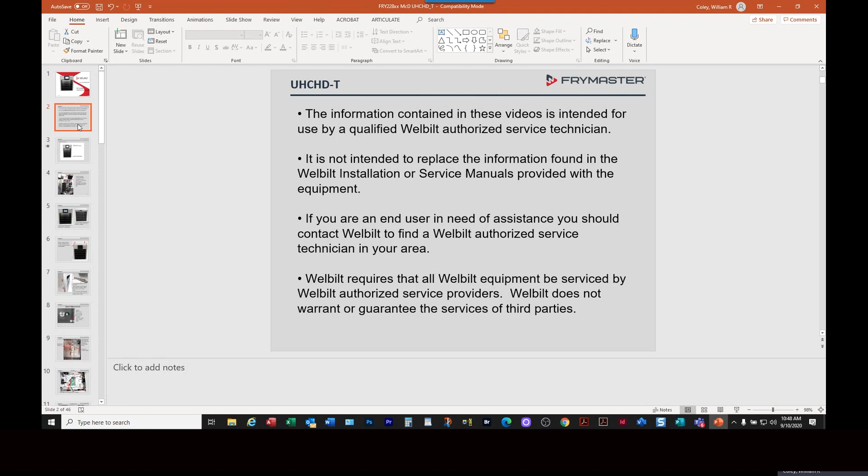I've got a brief video here. Let's put this in show mode for it to run, in which you can see the cabinet operate. The purpose of this is essentially just to see how the touchscreen behaves in operation.

This is an earlier version of the screen, so there may be modest variations. As I said, the cabinet was introduced in February, and there's been some running changes with the software that have changed the screen, but the gist of it is what you will see here.

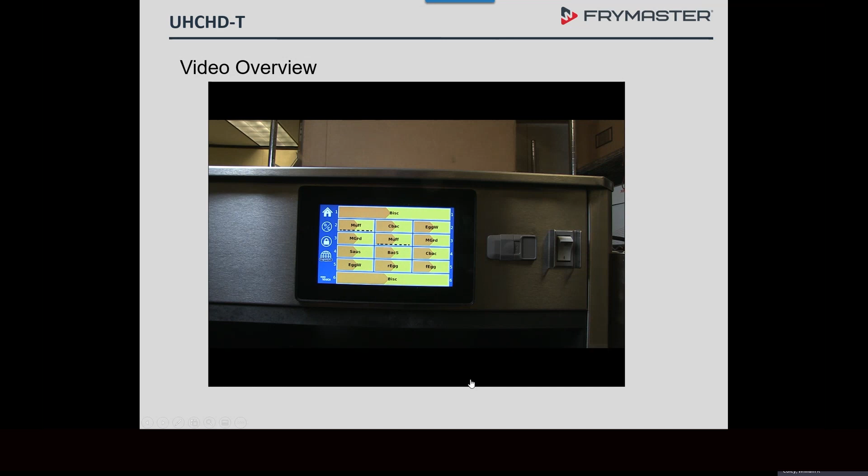The new generation of UHCHD cabinets introduces a single touchscreen to control all cabinet positions. The touchscreen on the UHCHD Touch opens a press-and-go screen that displays a yellow and brown graphic as it warms to set point. The moving brown bar shows the progress of the heating. The icons along the left side of the screen can be navigated as the cabinet warms.

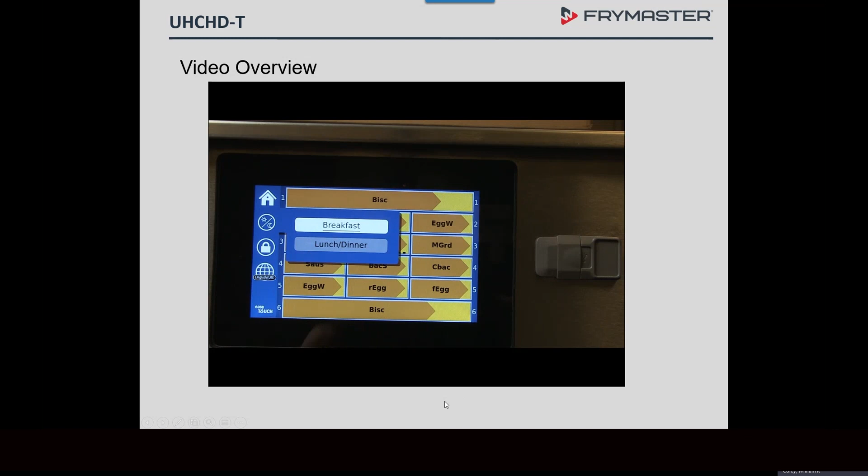Pressing the Day Parts button produces a pop-up that allows switching from a...

We can stop that there. That's some operational stuff. As I said, the screen has changed some, so it's different in appearance, but not operationally. It's still largely the same. Just to give you an idea how it behaves.

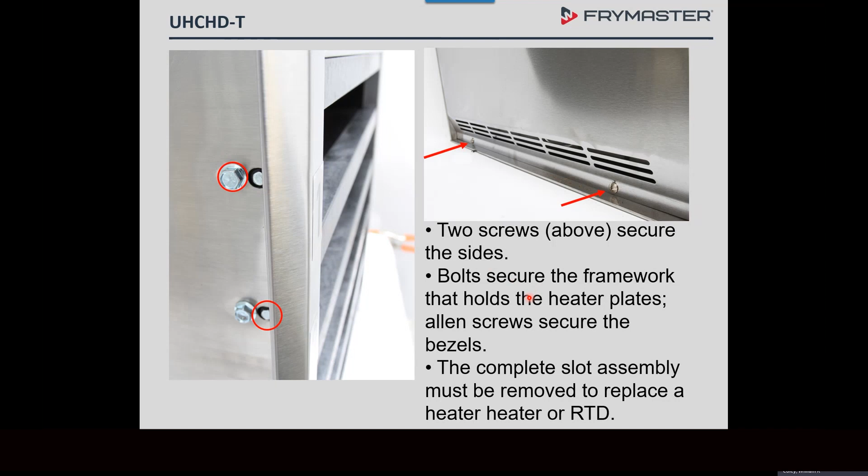This little screw will be on every one of the bezels as well. It's allowed to basically pull that L-shaped bezel in square against the vertical face of the cabinet, ensuring that no food elements can find their way into the recesses of the cabinet.

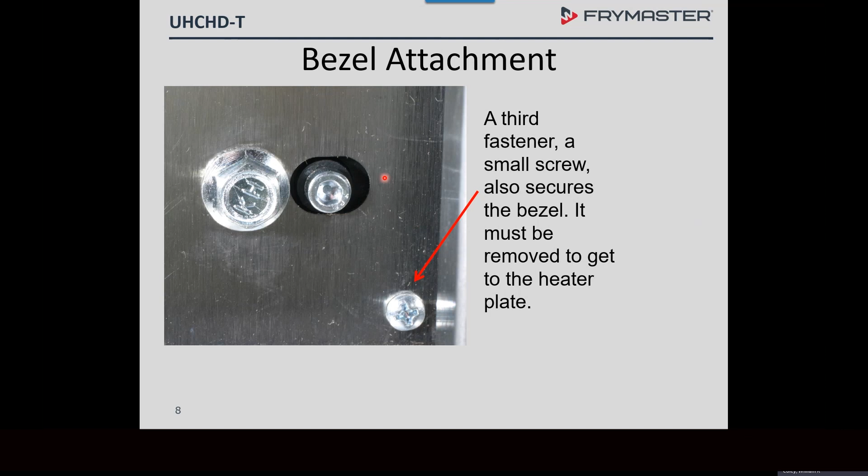But if you find yourself needing to take off the side or take out a bezel, this guy can flummox you because it's not readily seen unless you poke your head around there. So if you take this out, loosen this, and are about to remove the bezel and it won't come out, you need to look for the screw. If you don't, you'll find yourself breaking the bezel trying to pull it out.

This unit, unlike the others - if you replace a heater, you don't replace the plate. The heater is stuck on. So you take the plate out, pull off the old one, put on the new one, and it would have the new RTD on it. So that's a different operational or technical procedure that would occur in the field.

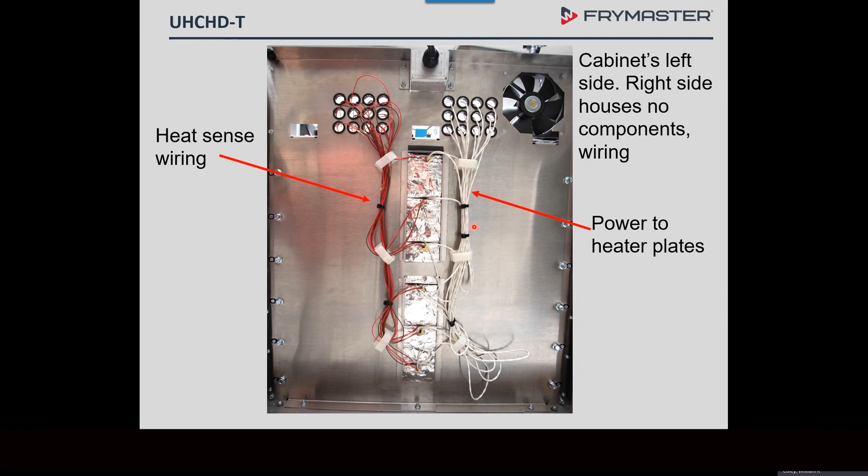The heater is the foil-backed resistive material that is stuck on to the heater plate. There's not a new sheet of metal that goes out as a new heater plate.

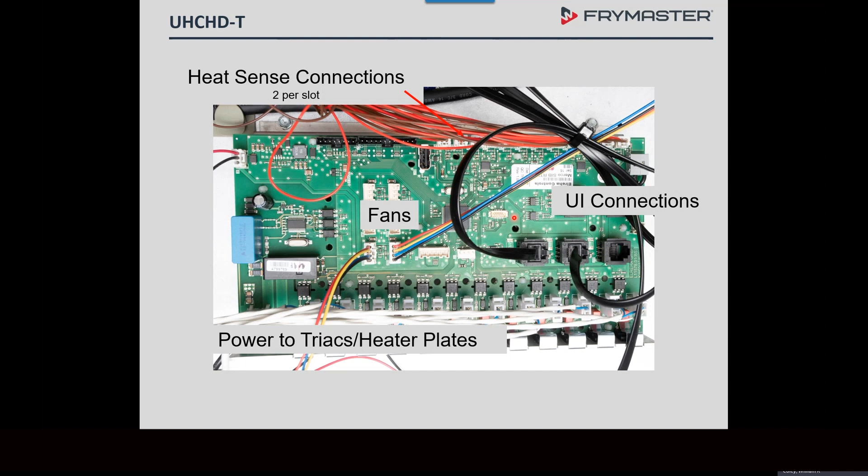Here's a close-up of that main board. You'll see the fans connection there. The fans are 12 volt DC. There are the UI connections. It's all pretty straightforward.

Excuse me, get a drink of water. That's how that looks.

When you replace one or the other, say if you replace a front UI, and if there had been a software update from the time that UI went out as a service part and reached you, and your unit had an earlier version, you'd also need to replace the software in the rear UI. You check that, we'll get to that in a bit. But when you check the software versions, you have to go through the steps to reach the software version display with the front UI, and then repeat those key entries into the rear UI to see what software version is showing. If they're out of sync, then you would need to replace that.

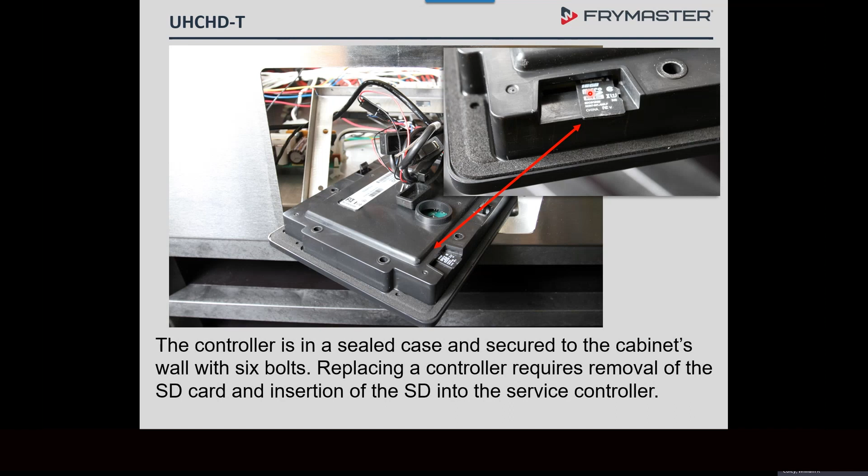But like I said, the kit does include a front and rear SD card with the software on it, and you just have to be attentive to which one you're replacing when you install the new UI. Again, this is another shot of all the USB ports and whatnot that are attached to this primary UI that you have to be attentive of when you're removing it.

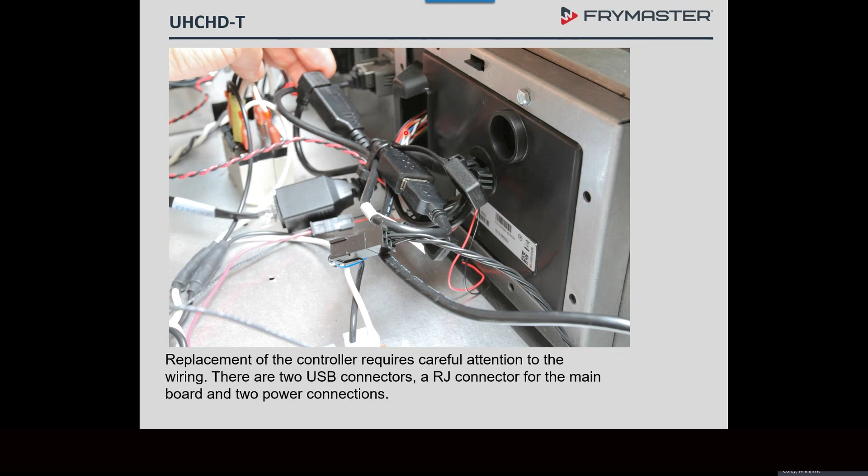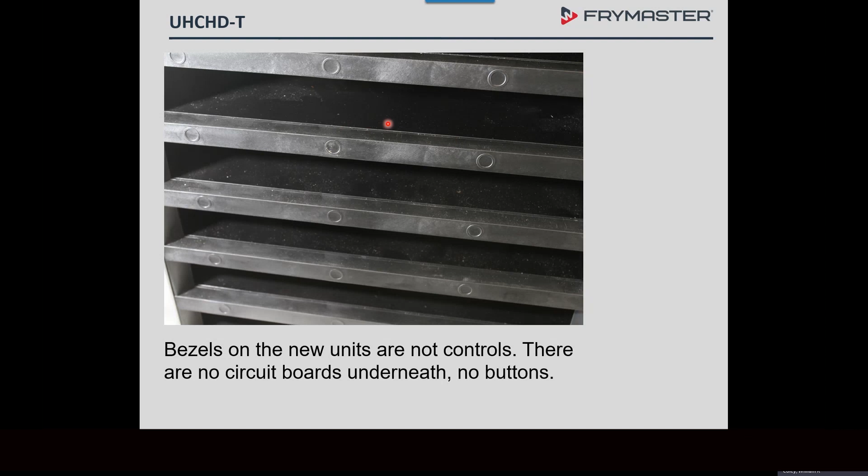There's no vulnerability associated with migration of oil, either rising from the heated trays or finding its way into the screw. There's nothing there for them to trouble. You may find on occasion that pulling the trays in and out might loosen this, but that's not an operational issue. You may find yourself replacing one of these bezels or cleaning it because of that, but there's no harm to the electronics of the cabinet because of harm to that bezel.

Quick look at the wiring diagram. As I mentioned, it's 208 single phase, so you've got it coming in through this line filter, circuit breaker here, the switch here that is basically protected from the heavy line voltage by this relay here. Throw that, and you get your 208 to the heaters. You get your 208 to the 12-volt DC power supply, which also supplies the power through the board to all the other components in the unit.

The UI that we talked about has its own onboard power, and it runs initially off the 12-volt DC, makes additional power to run it, but there's no replaceable components within the UI. If it's failed, there's no component on it that you can replace.

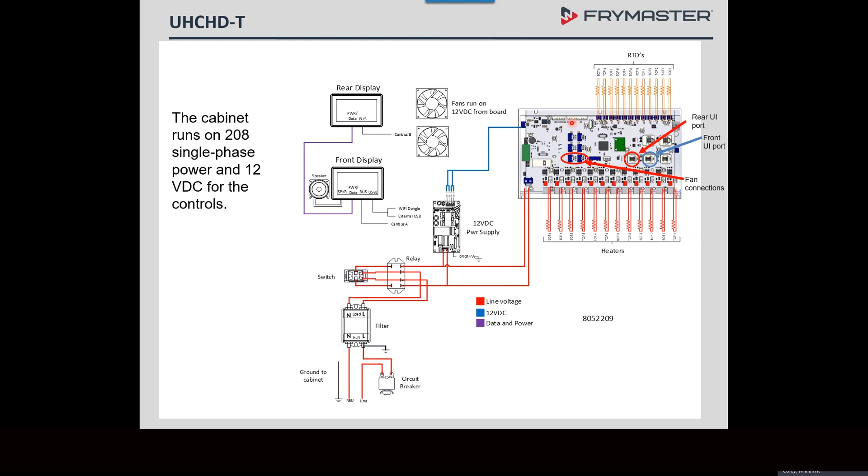This is the screen. This is essentially where you will interact and where the store will interact with the cabinet. The icons on here, press and go at the top left, is arrived at by touching the house icon. That's press and go, and it essentially takes you to the operational field. That's where all the items would be shown. When they're gray, it's at operating temperature. They touch it, it changes colors. We'll go through a little more of that later.

The book icon, top right, is where menus are changed and edited. The cog is the settings area, and we'll go through that in more detail. There's 11 screens behind there. That's the area. If you find yourself having to deal with the cabinet and use some of the onboard diagnostics, you'll use that. The other USB icon is for loading menu updates. It's highly unlikely that you would be involved in dealing with that.

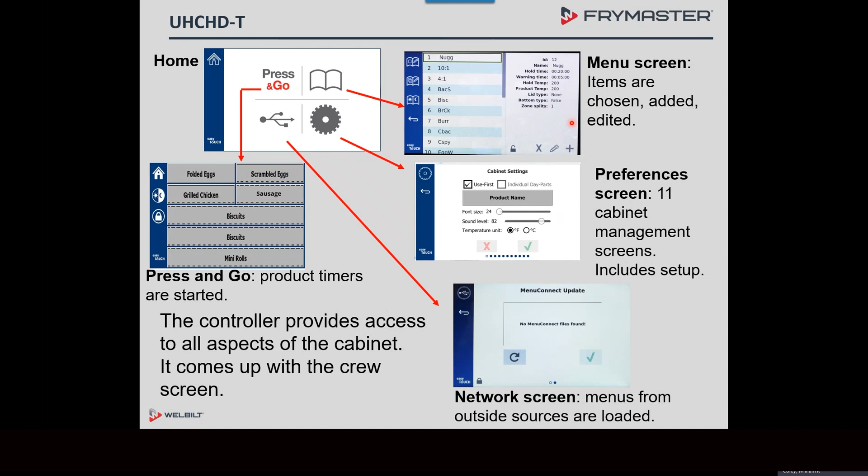Here's a further annotation of how all this works. As I mentioned, the screen to the right shows the icons that populate the face of the UI. The house icon takes you to that primary screen we talked about.

That circle with the horizontal lines through it takes you to the screen shown there, where you can make adjustments to the cabinet by pressing this leaf button. You can put it in what's called eco mode. It's not unlikely you'd have an instance where somebody did this inadvertently and the cabinet isn't reaching temperature. But if you push that button, you reduce the temperature on that row to something less than the holding temperature it's set for - a programmable number - basically to save energy.

Then you push it again and it comes back. It's different than turning it off in that it doesn't go cold - it stays near to temperature. So that's a tool they can use with rows that are unnecessary but might become necessary. They can reduce their power on and off. To turn them off completely, use these buttons over here. But all that is revealed by pressing that button, so you get to that.

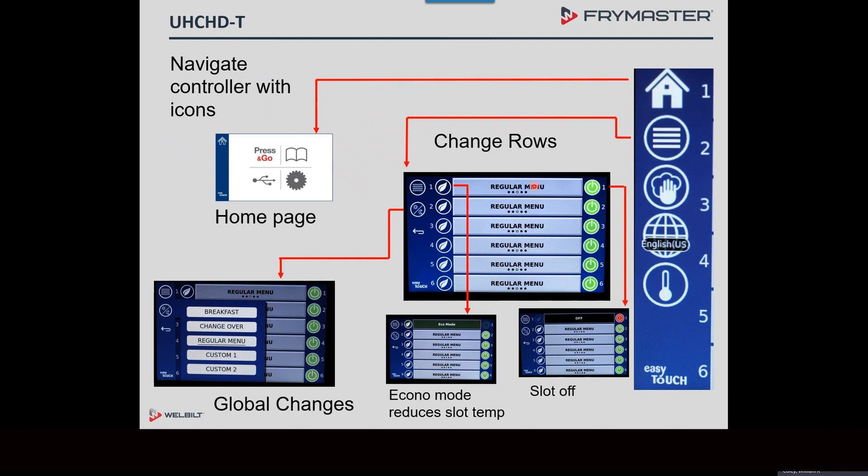So that's pretty much that. The temperature - I guess we'll get to that in a minute.

Another thing revealed when you press the icon below that, the wipe down icon, is the opportunity to put it into cooling mode, which is something you might be familiar with from earlier units. They have to be 125 degrees by McDonald's spec before they can clean them, so this puts them in cleaning mode.

If however you just want to wipe off the screen because it's got grease on it and you don't want to inadvertently change a timer or whatnot, you push the clean button, which produces a new screen with this lock button. The lock button just locks the screen for 10 seconds. So if you push the lock button after pushing the screen or cleaning button, you now have 10 seconds to meaningfully wipe down the screen without turning on or off any buttons. That's where that's hidden, and probably more so for the store - this might be confusing and you might be asked about it.

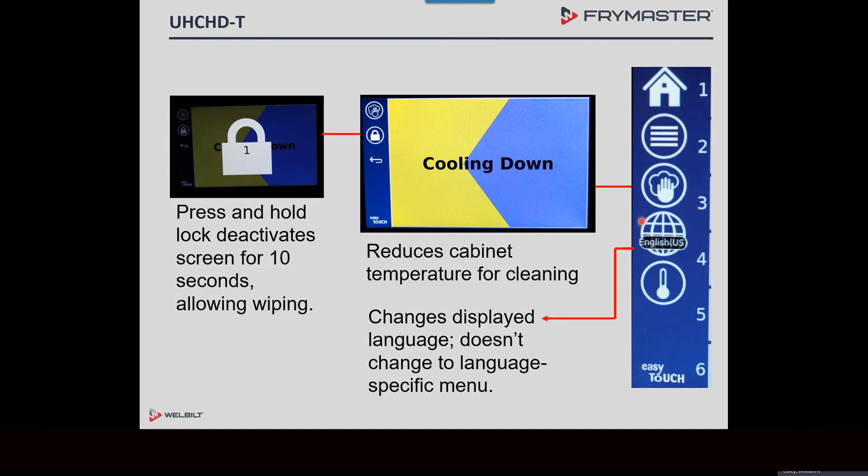But that's that. The globe button changes the displayed language. It doesn't change the language of specific menus - we'll talk about that briefly - but that just changes the displayed language on the cabinet.

The temperature button, push that and it shows you, as shown here, the temperature of the top plate and the temperature of the bottom plate. This cabinet, like the others, if you've got it set up for 3 slots, 3 food positions, all the food items on a given slot - say slot 2 - would have to have the same holding parameters.

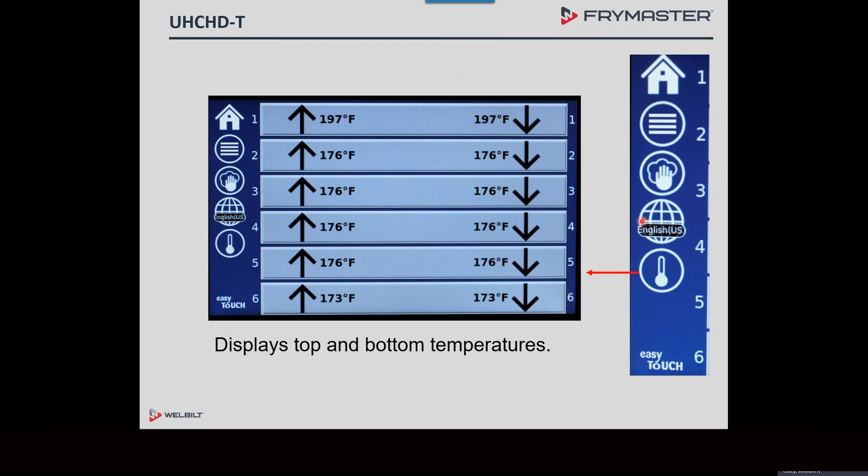It won't allow you to put a product that has a 200-degree holding parameter on a slot. It just won't show you that product when you try to choose it on a slot that has, say, 175 degrees holding.

Settings. This is the area that I mentioned that you reach by touching this cog. The first thing you enter is this, where you can change the cabinet.

This would probably not be that interesting to you guys, but that's where you can change the font size, the sound level, the temperature display from Fahrenheit to Celsius. You can turn off the use first piece.

We'll get to what that means in a bit. If you press and hold down here, where the scrolling dots are shown, you'll get essentially a table of contents representing all the screens you can scroll to, so you can get to something more quickly rather than scrolling one after the other, and make your way directly to what you're interested in.

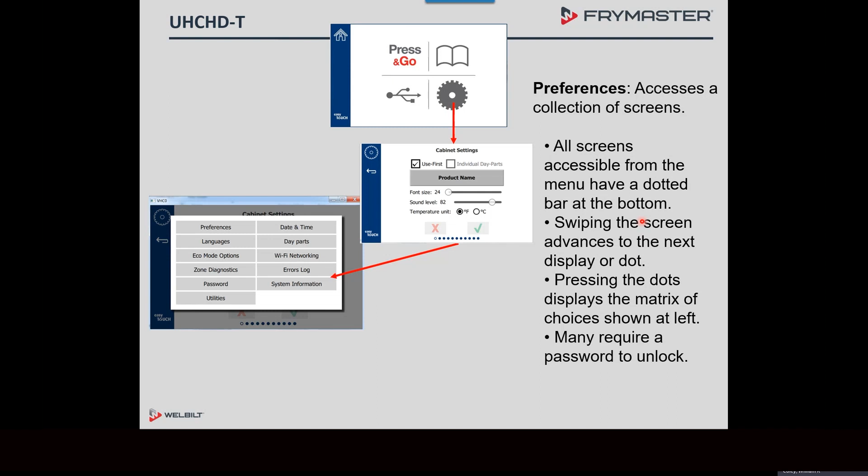So as we talked about, these are the preferences we talked about briefly. Displayed language choice, eco mode options—that's where you set the temperatures that surround how you want the cabinet to behave. You put it into eco mode.

Zone diagnostics we'll talk about more in detail later. That's a diagnostic feature that you'll find useful if you're chasing a problem with an RTD or displayed temperature discrepancy.

Passwords—you can change the manager's passwords. This is where you would correct the problem if somebody had done that for you and didn't bother to tell the manager. You can check the sound.

You can check the screen with that. Date and time—this is something you might need to get into if the cabinet arrives at a site that's not central time, because we set all that here. When they leave, there are batteries to power that part of the controller when it's not powered up, so it should be accurate if you're in central time, but if not, this is where you'd interact with that by pressing that button. We'll see some more of that in a bit.

Day parts is where you can name or turn off that menu. Wi-Fi is where you would hook it up to a Wi-Fi in the store, if it's currently not in use in McDonald's.

The error log is where you would see errors in the cabinet, and this cabinet, unlike other products, doesn't use a code. If there's an error, there's an English explanation, or at least a brief word or two that gives you an idea of what happened. You don't get something like E34—you're going to have a word description of what went on.

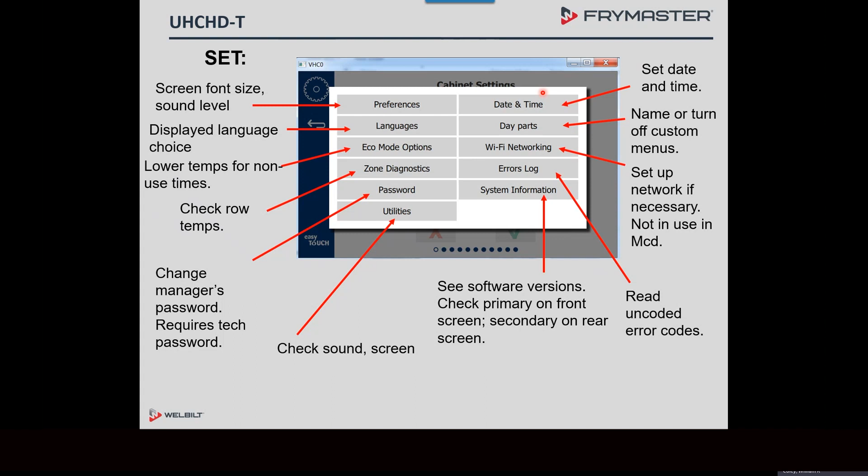And the software versions I mentioned earlier as being important to you if you were changing a UI, because you have to do both the front and the back. It's not apparent that you're not seeing both when you see just the front, but if you replace the rear UI, you need to go through all this in the back to see the software load that's on that UI.

Talked about languages—this is the languages right now that the cabinet can display. Here's the password that is the technician's password. It's 159357. It's made easy to remember by the fact it's essentially just an X pattern.

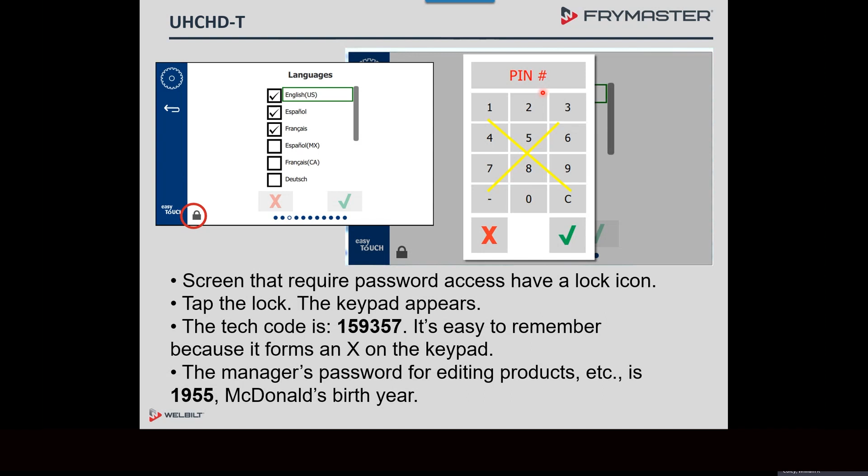The manager's password is 1955, which is McDonald's birth year. So if you're planning a birthday party for McDonald's, then you'll know their birth year, and that's the code for the manager. But the tech code is essentially just an X pattern across the keys of the keypad.

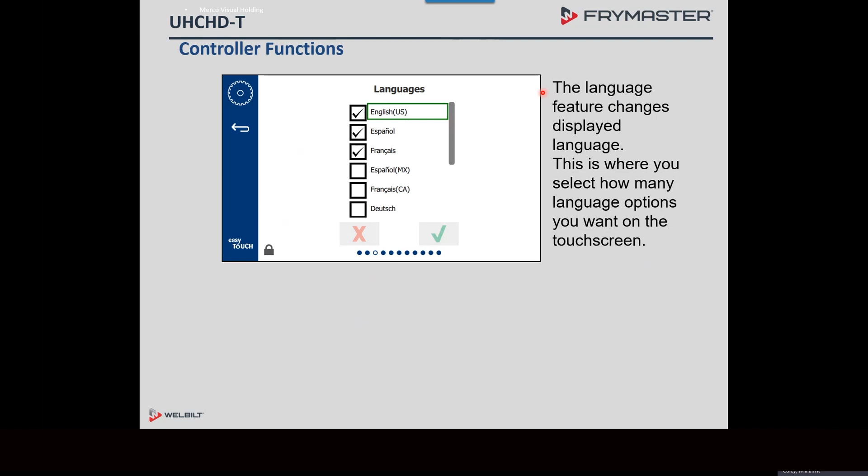We've talked about this—this is where you change the displayed language. The way you would change or acquire a different language of products is different than this. This just changes that component of it. Changing the menu load with, say, Spanish language articles, food articles, or whatnot is a different deal.

This is where that's done. You have to go in through the USB, and if it has them on board, it would allow you to choose among language-specific menus. You'll find in Australia, say, although that's English, there would be an Australian language to be chosen, and what you're doing there is choosing the Australian-specific menu. The same is true in other countries that speak English, like England, where the products for that market are different.

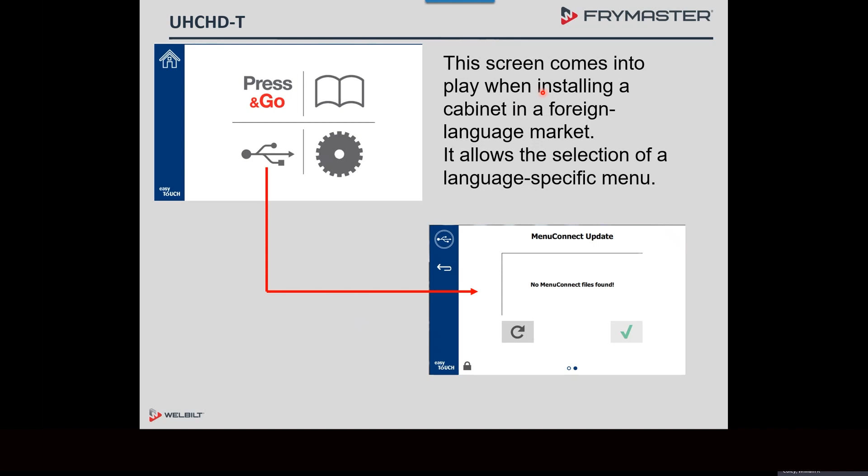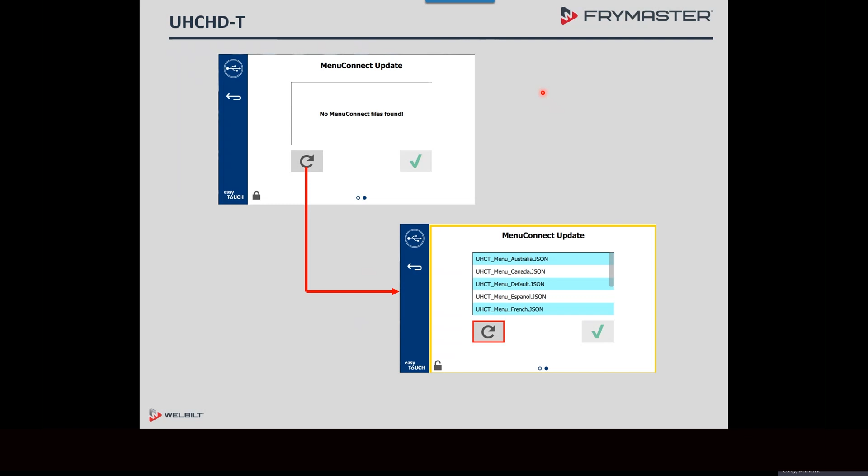So when you choose a different language product or menu, you're choosing largely different products—you're not just changing the language of the items you might be familiar with in the US. Here you'll see there's Australian, Canadian, Spanish, French. But as I said, in most instances—I'm sure there are exceptions where the menus are exactly the same—when you choose a menu that's different than the US, you're going to get not just the US menu translated, but a different collection of products.

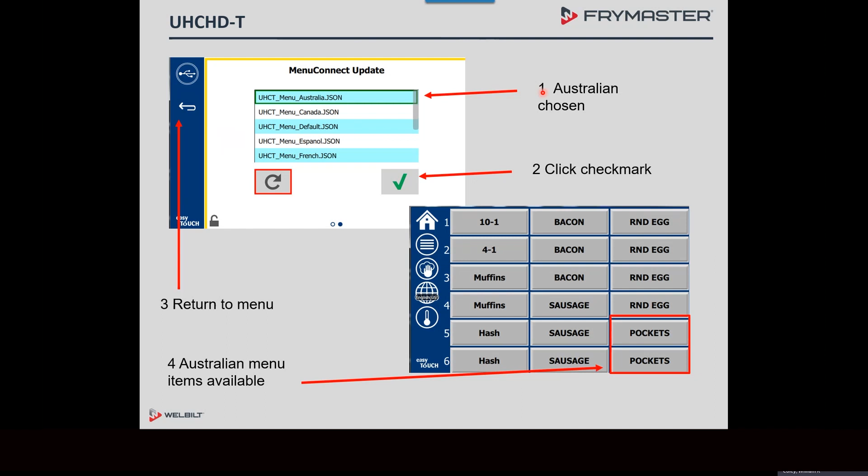Here you'll see that we've done it—we've chosen Australian, and they have pockets, whatever the pockets might be. That's what they have, and it will scramble your display. So where previously something else was shown, now you'll have pockets. Just something to be aware of if you bumble into that.

The importance of this probably only arises if the cabinet is on a network, and increasingly that is coming. As our equipment goes online and can be seen from afar over the internet, the necessity of entering that information rises. So it's something you might want to ask about, but that's something that needs to be done upon installation.

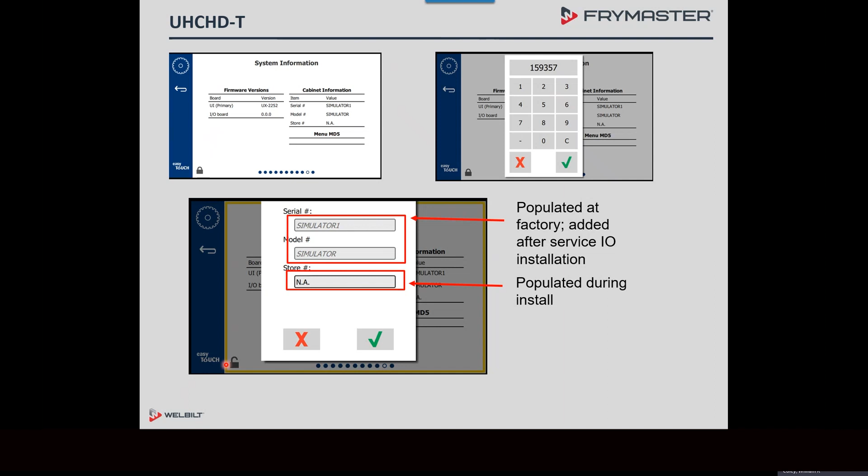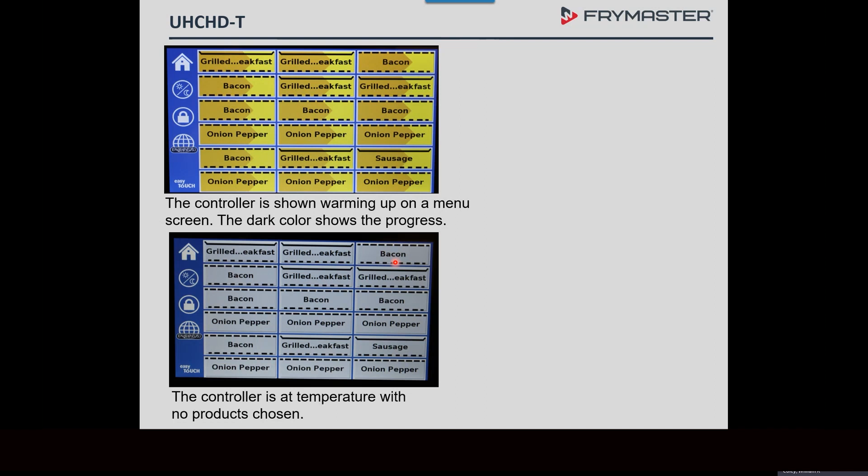But this is still not timing, this is just that they're at temperature. These dotted lines down here represent the presence of a trivet in the tray itself. But again, this is just the cabinet at temperature, not timing anything.

When it's timing, they'll be green, and you'll see the remaining hold time. If a second same product is chosen with a timer already running, the second one chosen will go gray. What happens is as this one expires, this one would go bright green.

It's just part of the McDonald's first in, first out process. Their intent is to exhaust this tray before they take anything from that, so they're using the first ones to go in before they use the second one of the same product to go in. When the timer has timed out, you'll see it go red, and then it'll start to add time.

That shows how long the holding time for that product has been exhausted. As it nears the elapsed holding time, it'll turn yellow, and that's intended to serve as a cook more warning for the staff.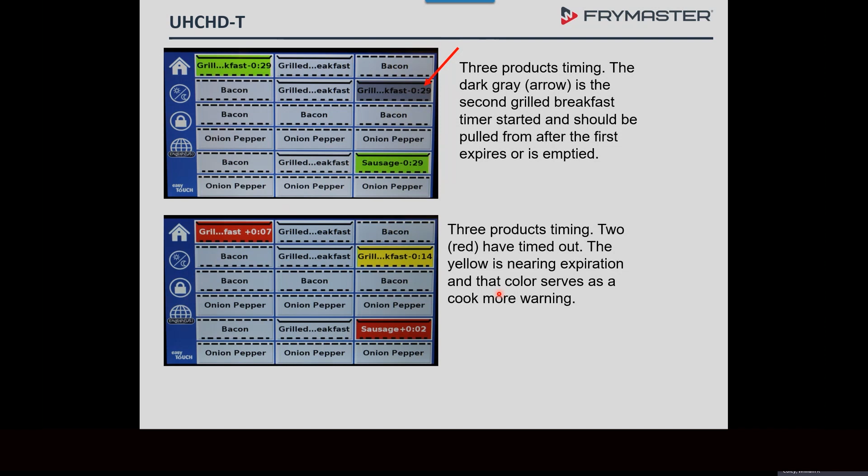I'm going to skip over this. There's another whole training available as a more interactive piece where you can touch icons and it'll have pop-ups and show you different components. It's essentially the same things I'm talking about, but you can hover over them. It's on our Google Classroom page, and I'll talk about how to get to that later in the program. But if you want to spend more time with this, changing a product would be something I wouldn't think you guys would be involved with, so we'll skip ahead.

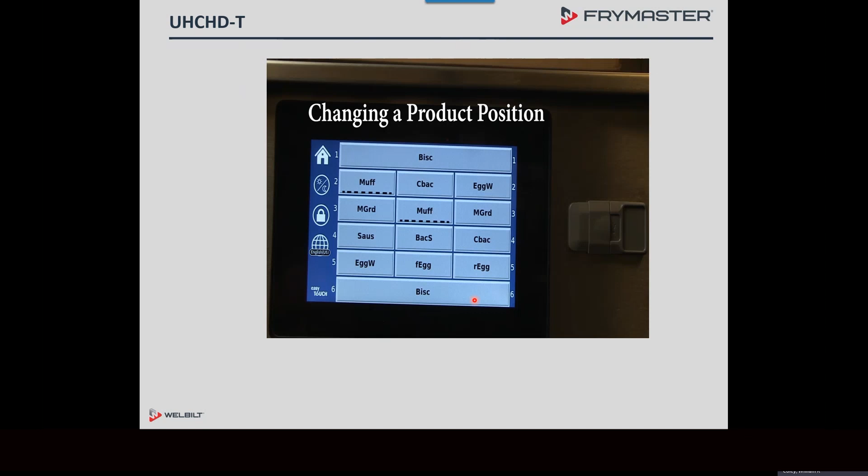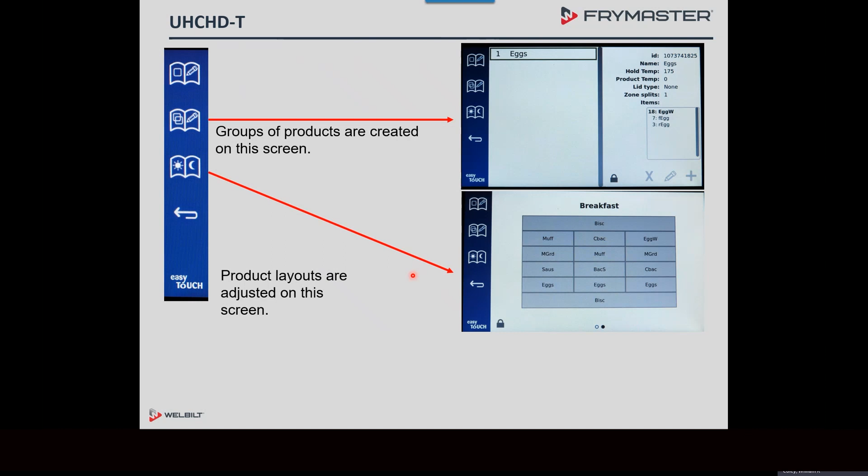Maybe we'll go back to that bit in a while, but that's basically a store function.

You can create a product group. Basically what that means is you'll see here we've got egg whites. Well, eggs, virtually all the eggs are held at the same temperature. So if you found a reason in the store to change from egg whites to eggs to round eggs or scrambled eggs, or whatever other products that are all held at the same temperature, you could achieve a swap of this position from egg whites to, say, scrambled eggs just by taking your finger and swiping.

So there's that dot function that we talked about earlier that's available in this cabinet, and it hasn't been available before. So that's what those dots mean.

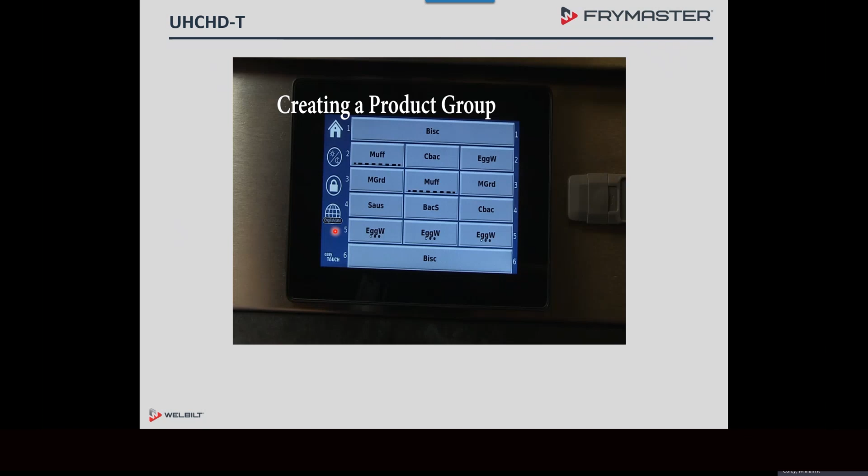This video, I'm going to skip. It just shows you how to create a product group. Basically, you would find those things that have the same temperature and put them together, then put them in that product group. So once you've chosen a product that's in a product group, that product would be shown along with the number of dots equal to the number of products you could swipe to by going across.

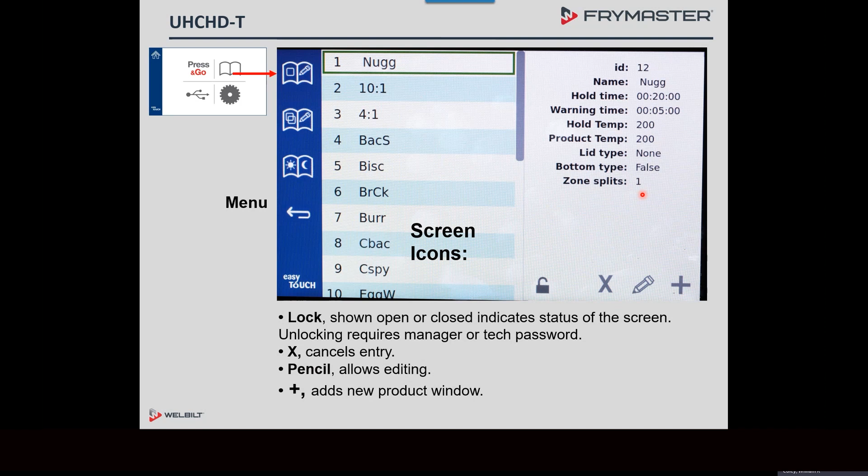Now let's watch this one. This is the preference screens that we talked about.

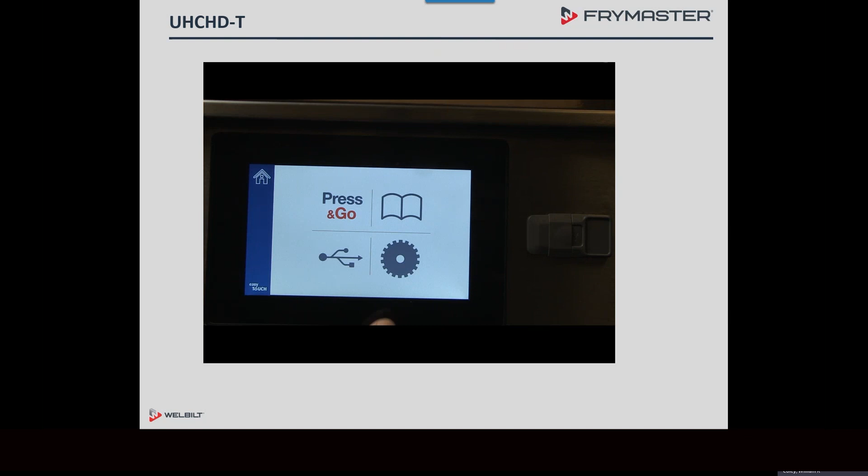Navigate to the home screen by pressing the house icon. Pressing the screen icons allows navigation of features within the controller. The gear icon opens a path to 11 screens. The first is Preferences, where font sizes, sound levels, and other functions in the cabinet can be adjusted. Move through the screens by scrolling.

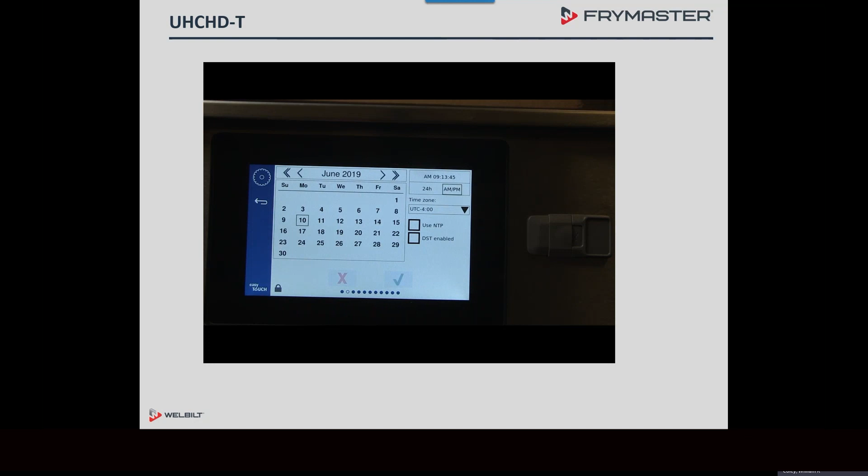The next screen is the Calendar, where the date and time are adjusted if necessary. The options are labeled, and those that require a password to change are marked by a lock icon in the bottom left. Zone Diagnostics provides a window to the cabinet's temperature holding ability. It also shows the temperature of the component shelf and the controller. It has a role in troubleshooting, which will be covered later.

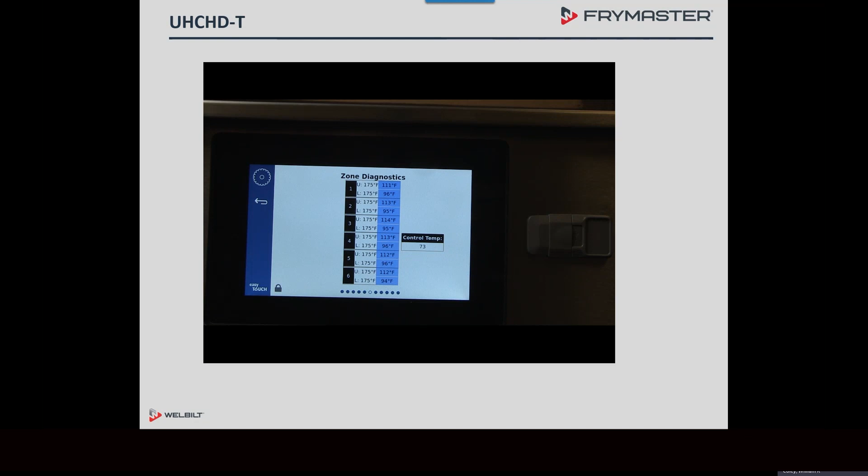The sound and screen display quality can be sampled with a password, 159357. Press the green check after entering the code.

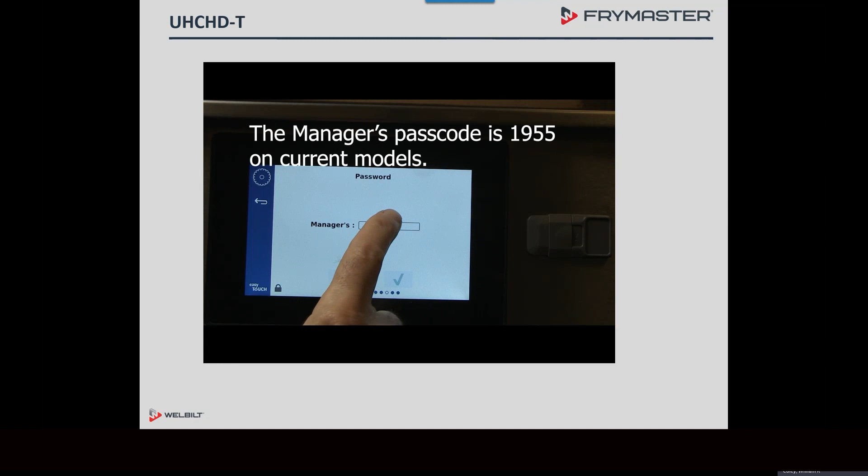The error logs contain non-coded errors. The manager's passcode can be changed. It requires entering the tech passcode first.

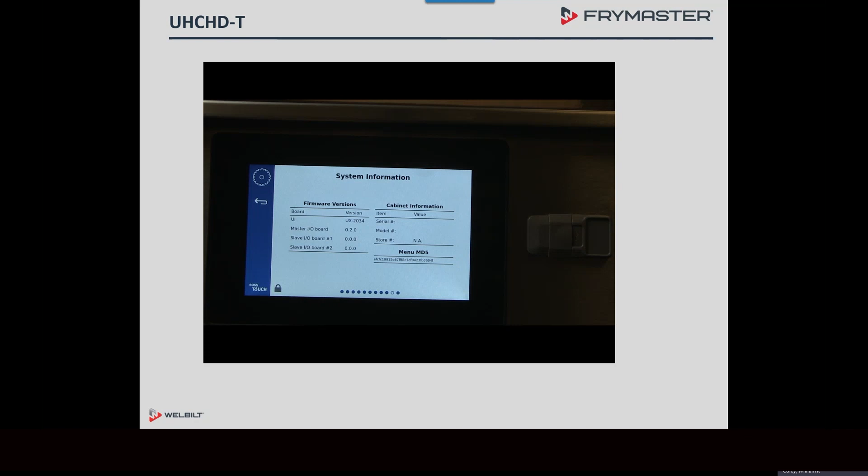159357. System information and utilities are found in this section of the software. Navigation of the menu is possible with scrolling, or by pressing and holding the dot pattern to display a matrix of choices. Navigate to your choice by tapping it.

So that's a lot of what we covered earlier.

Here is the zone diagnostics. This is the piece that I mentioned that would be most useful to you if you're chasing an issue with a temperature row that's not holding temperature.

You can test the RTD's accuracy by looking at this. This is your set point. This is the actual temperature. By entering the test code, you can open this up.

You could go in and change this to, say, 100 degrees, 150 degrees, and see if this changes. There will be more slides that address this in a minute, but essentially if it's more than 15 degrees off, this changes color, so you can see if there's an issue there.

You can move the wires from the RTDs on the board, changing their position to see if you're chasing a problem associated with the RTD or the board, and see where the problem goes.

This temperature control is our control temperature. This is actually the measurement of the temperature within the shelf that's holding all those components. That's important because the response of the UI's touch controls becomes a little dicey if the temperatures get above, between 140 and 160.

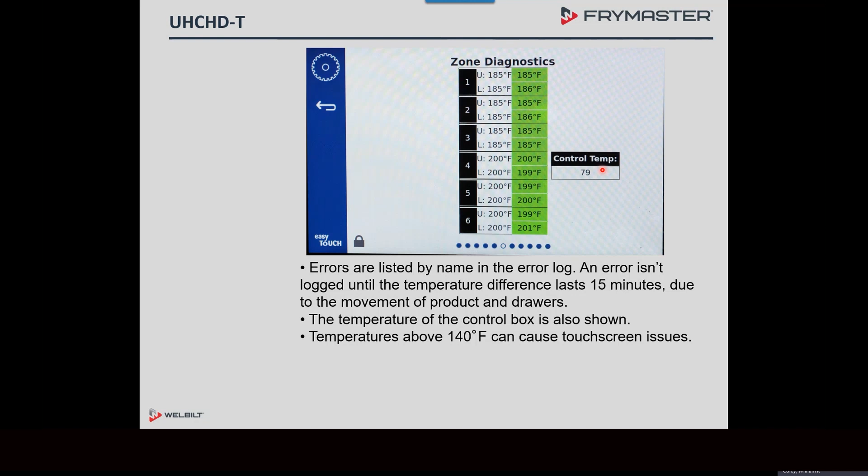One thing that top bullet mentions is that when we get to the error log piece, temperature errors particularly aren't logged into the error log unless they last for at least 15 minutes. The reason for that is with trays being taken out, put back, cold trays near a window, you need time for it to stabilize and understand that there is indeed a problem and not just something introduced locally by circumstance.

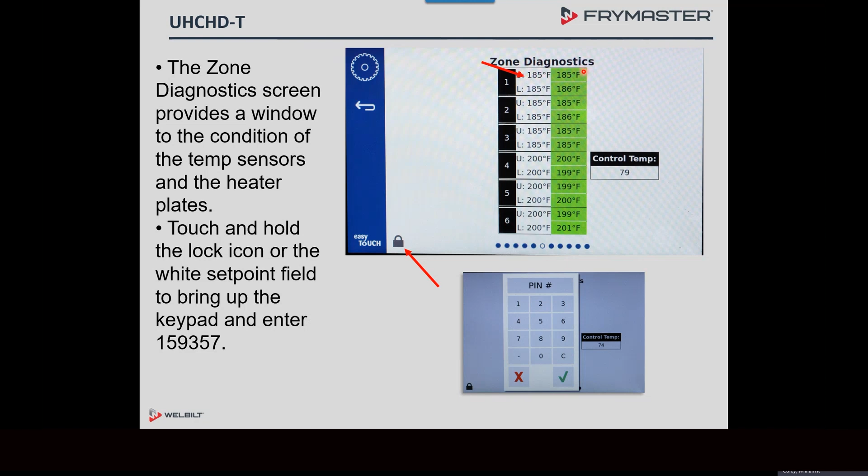Here's the bit about zone diagnostics. This is our set point, that's the temperature measured by the RTDs. We can go in and change it, say from 185 to 150, and we can see that go red because it's too hot for the prescribed point. So it is 5 degrees above set point when it goes red. I was a little wrong-footed when I said earlier it was 15 — it's 15 minutes for the error control.

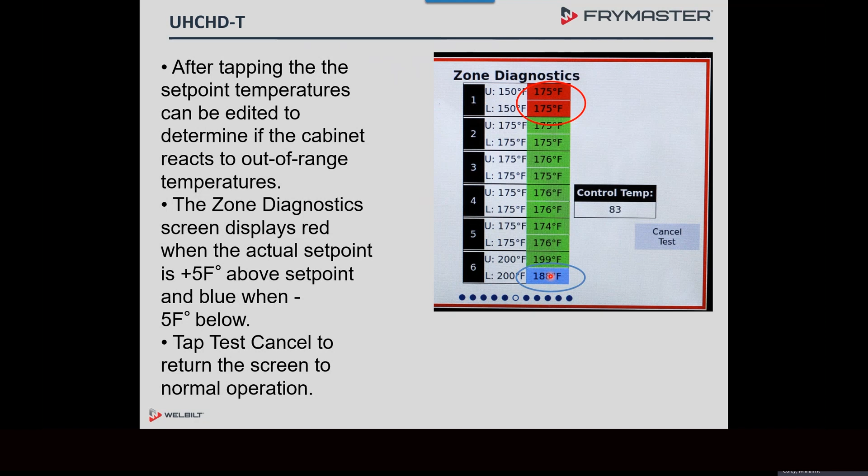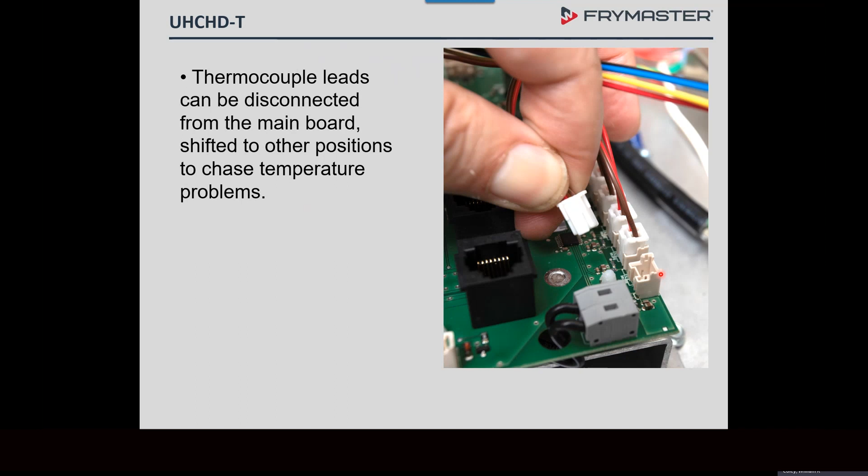So then you see the same thing here where the temperature is too cold. This is where the RTDs connect to the board. It's a pretty robust connection that clips into place, but you can unplug that and move it to another position on the board to see if the issue with a slot is isolated to the RTD on the board, on the cabinet, on the plate, or to this connection or something related to the board. You can swap that around and revisit the zone diagnostics to see where your problem resides.

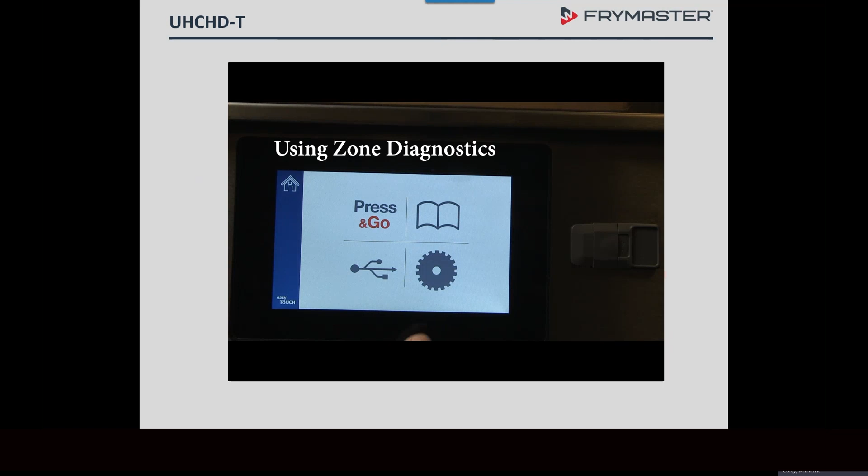This is a short video that shows using the zone diagnostics. From the home screen, navigate to the Preferences screens. Scroll to Zone Diagnostics. Tap and hold a set point position on the graphic. Enter 159357 on the keypad. Press the check mark.

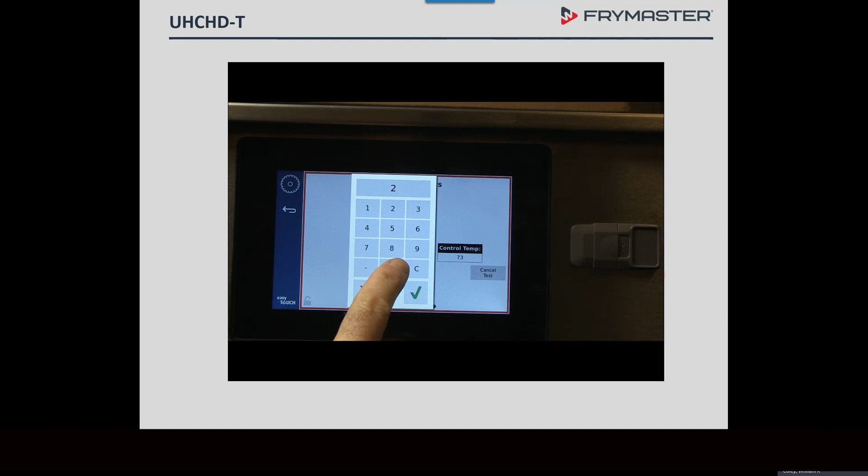Press and hold a white set point position. Enter a temperature on the keypad that's more than 5 degrees off the set point. The color-coded temperature matrix turns red if the entered temperature is too hot, blue if too cold. This can be used when checking accuracy of the heater plate RTDs.

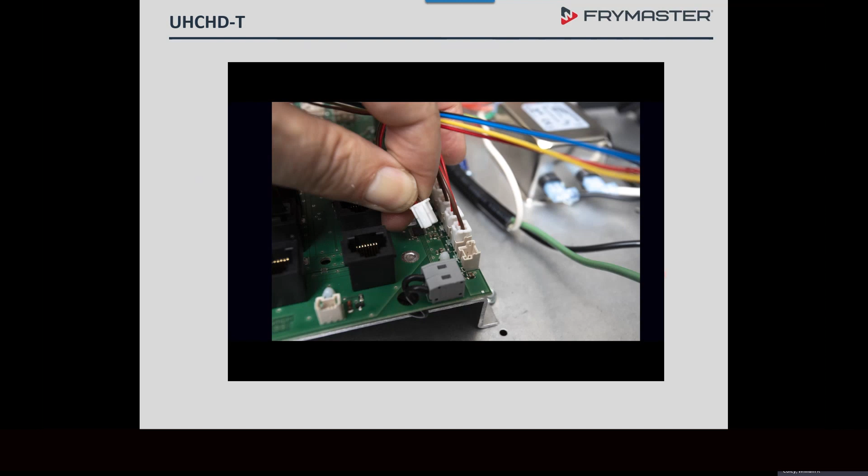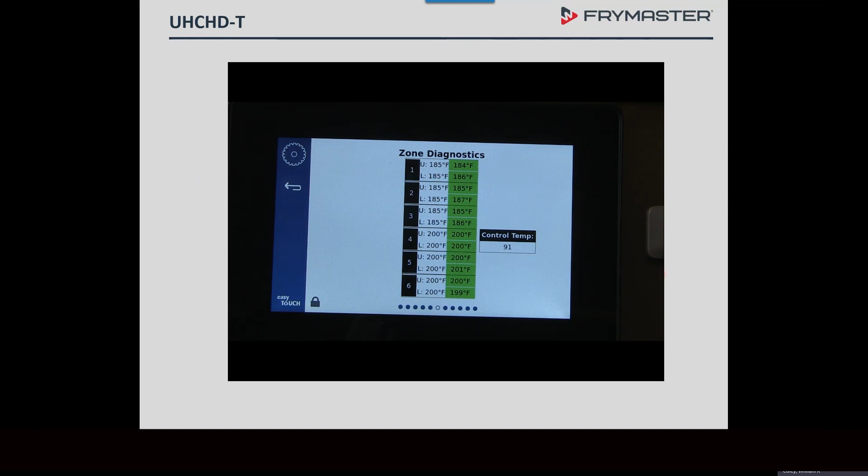The temperature of the component shelf is also displayed on this screen. The RTD terminals can be removed and swapped on the main I/O board while using this diagnostic tool. The cabinet can also be tested by pressing the service test box, which changes a number of set points to out of range. This results in color changes on a number of slots. An out-of-range temperature that lasts more than 15 minutes will produce an error code on the touchscreen and record an error in the log.

This is the error log that we spoke of. This is where you would find plain English explanations of an error that had occurred. So there's a time, and like here, secondary UI communication loss. A lot of these were created essentially for picture-taking purposes by unplugging things, but you can see that you're not trying to sort things with a decoder ring. You've got plain language descriptions of problems as they've shown on the cabinet.

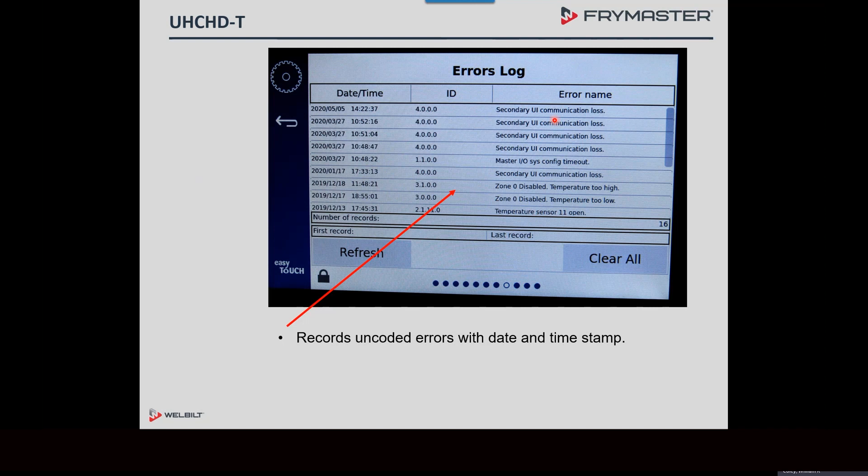And that's pretty much the top and bottom of where things are in this cabinet and how it behaves, what diagnostic tools you have. As I said, we've had considerable runtime with them in the store. The stores seem to be adapting to them pretty readily. We haven't had a lot of reporting back from the field in regards to problems with them.